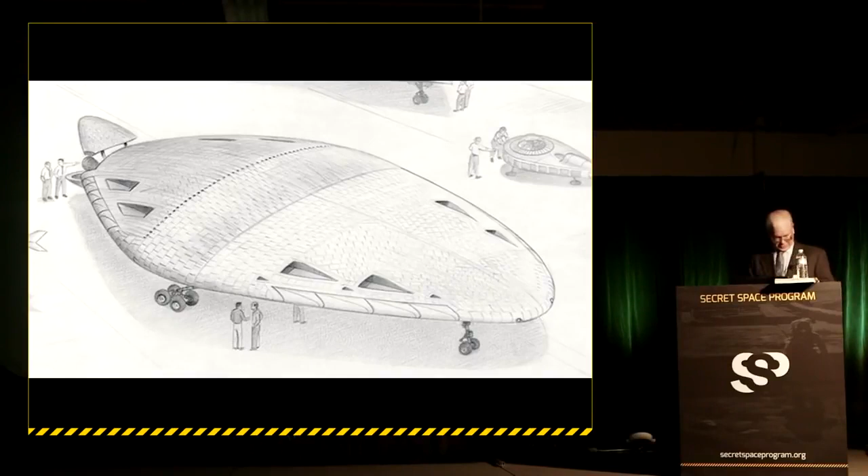Some of the vehicles include the so-called Flux Liner, or Alien Reproduction Vehicle. Okay, let's see here. Put this up a little bit. There we go, is that good? Okay, can you hear me now?

This is the first generation Aurora. It was a remotely piloted vehicle built by Lockheed Martin. This object you can see in the distance was actually taken from a Polaroid photograph that was taken in 1984 near Cedarville, California, up in the northeast corner of the state.

Now for me, this is one of the other vehicles here. This is a drawing put together by my friend Michael Schratt. This particular vehicle I'll go into a little bit as well. It was part of a crash recovery in East Germany.

Now, after I got out of high school, I realized that in order to go to the... okay, there we go, sorry about that... one of the things I was going to need to be able to do in order to go to the college I wanted to go to, which was a place called Art Center College of Design in Pasadena, I wanted to design cars for General Motors. And this was the premier college that all the designers would go to. And at $2 an hour minimum wage at the time, I knew that there was simply no way I could afford to save up the money to go there. So I decided to join the Air Force and get the GI Bill to help pay for my college education.

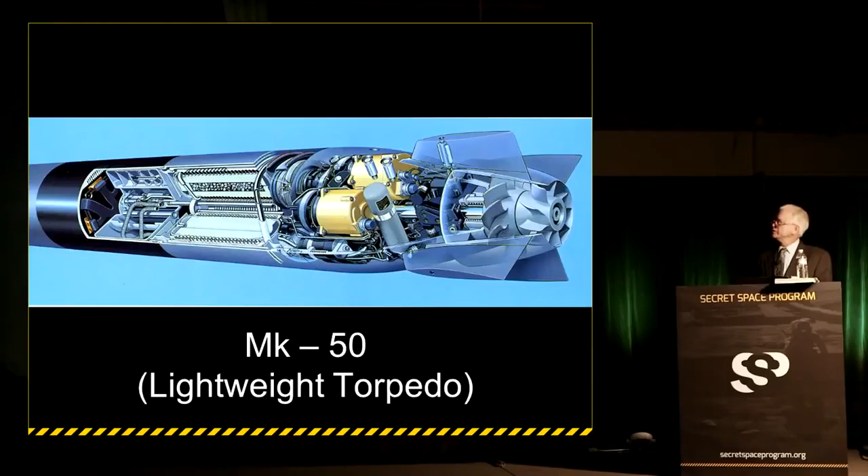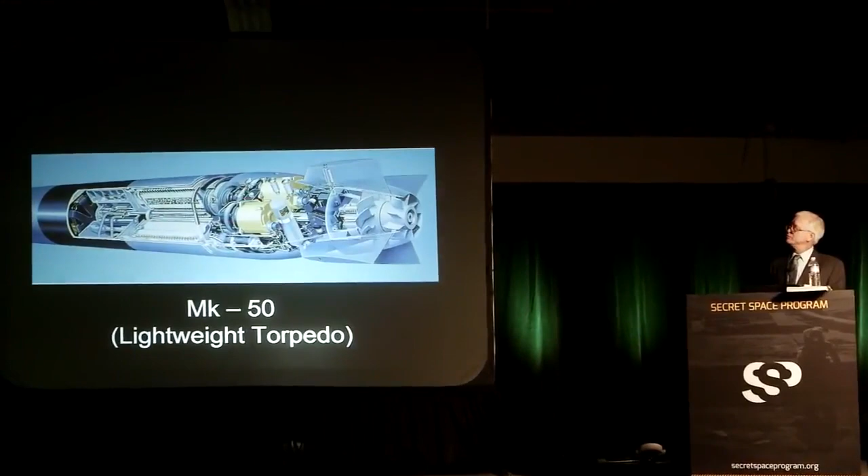This is a cutaway illustration of a propulsion system for a lightweight torpedo that basically involves a lithium core that is ignited once it drops into the water, and this heats up an oxidizer, flows through here, creates steam, high temperature steam through these heat exchanging tubes, goes through a transmission, drives a generator, and also a couple of counter-rotating props in the back.

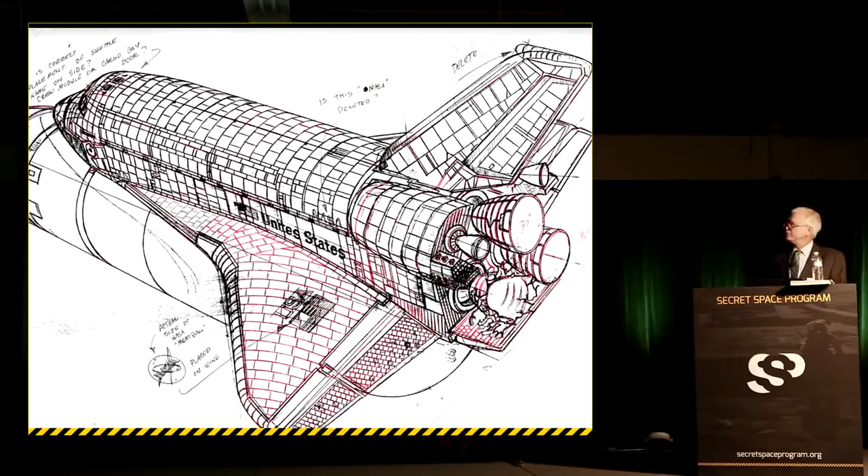But eventually, while I was working in the industry, I actually had the opportunity to make contact with a lot of people in the military, some of whom expressed an interest in having some of my artwork in their squadron ready rooms. So I was actually able to arrange to get what are called media orientation rides and go up in these planes and see how the pilots handle the stress of flying.

I asked myself years and years ago, if man had never taken the time to study flying insects or birds or bats or any kind of flying animal that we have on this planet, would they ever have had the inspiration to think of flying, to come up with the idea? I kind of wonder whether or not we ever would have been able to get off the ground if we hadn't had those other naturally occurring creatures to give us inspiration.

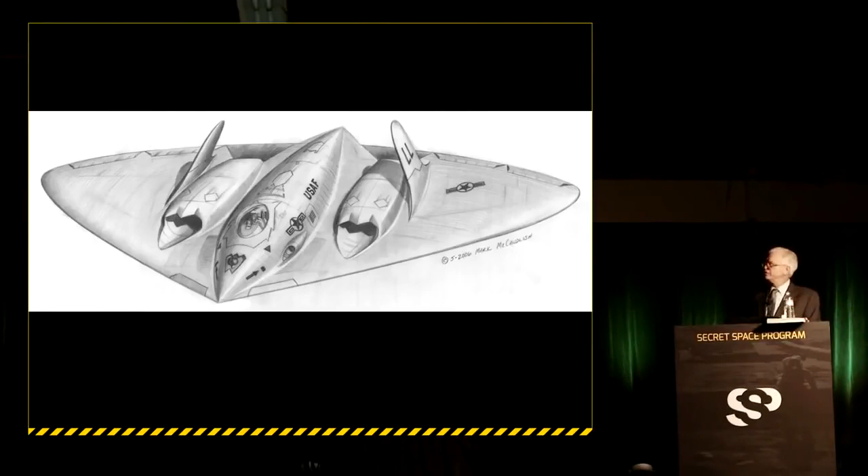There are ways you can modify the inlets for the engines so that when a radar beam from a distance is looking at the sky where the aircraft is, it's harder for that radar to get into the inlet where those metal turbine blades are turning and reflect a lot of the energy back, letting the people watching know that you're there. So applying these different techniques, looking for ways to make an aircraft perform better and do it very quietly, very stealthily, even in the materials that are used.

There have been a number of questions about what the name of this vehicle was, but for me, the discovery of its reality was kind of what led me down the road to being aware, or suspicious anyway, that there was a kind of secret space program. The way this happened, I was approached by Lockheed Martin—I think at the time they were still referred to as only Lockheed.

The particular division that approached me was working on behalf of the Skunk Works division. They said we have a new aircraft that we want to build, and we need to get the appropriate funds from the government.

So we need you to create an illustration for us that shows an aircraft that's really fast, something dynamic, very fast. At the time, I was reading trade journals like Aviation Week and Space Technology, and I knew one of the up-and-coming technologies they were talking about was called scramjet technology, shorthand for supersonic combustion ramjet.

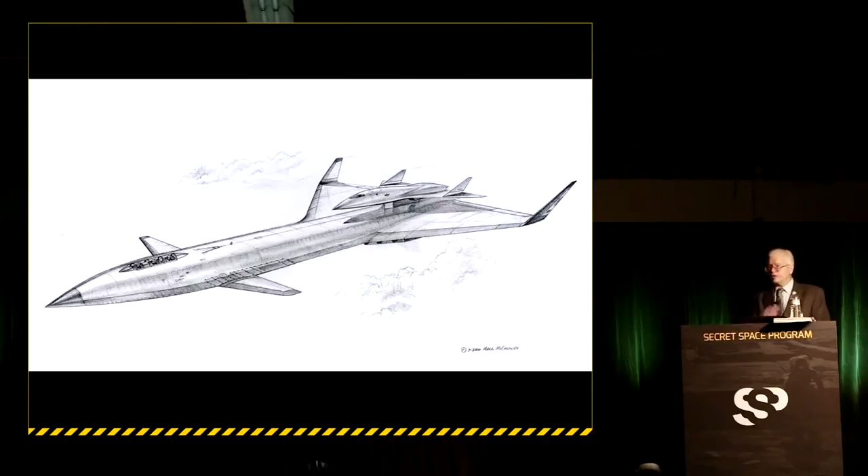Shortly after I submitted a sketch of this particular aircraft, they decided to completely scrap that. So I wound up doing an illustration of an aircraft something like this. There was one proposal where it might actually be possible to deploy this particular aircraft right out of the back end of a flying C-5A Galaxy.

And this is sort of my conceptualizing of how many you could actually fit into a C-5, knowing what the size of this aircraft was.

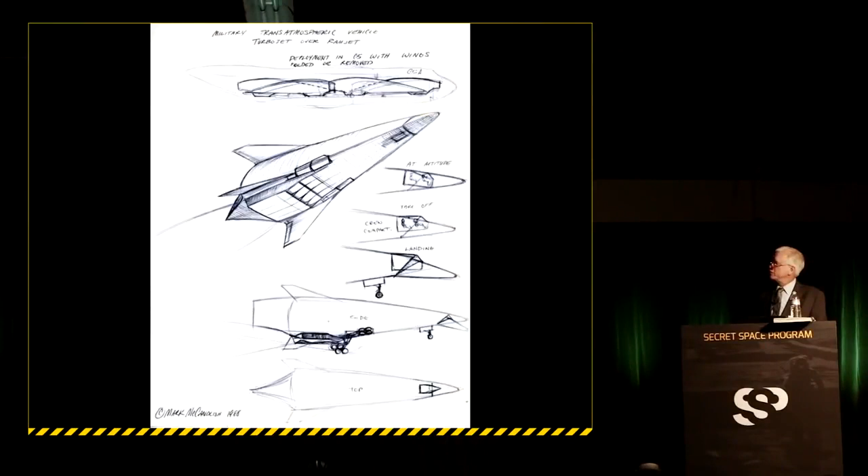It had a scramjet nacelle on the ventral surface, and it also had one on top. This particular version only had one underneath. And because of the shape of the aircraft, it made it very peculiar, or very awkward, where the landing gear would come out in order for this thing to work properly.

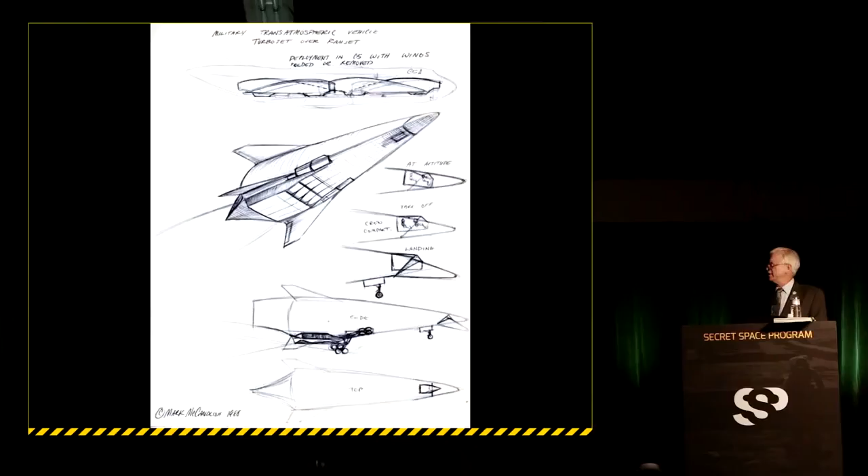Now, about the same time, there was a lot of talk about a crash, an aircraft vehicle crash that had occurred somewhere near Barstow, California. And there were some people describing different features of the aircraft. There was a fellow that I met and talked with who was friends with a number of the astronauts.

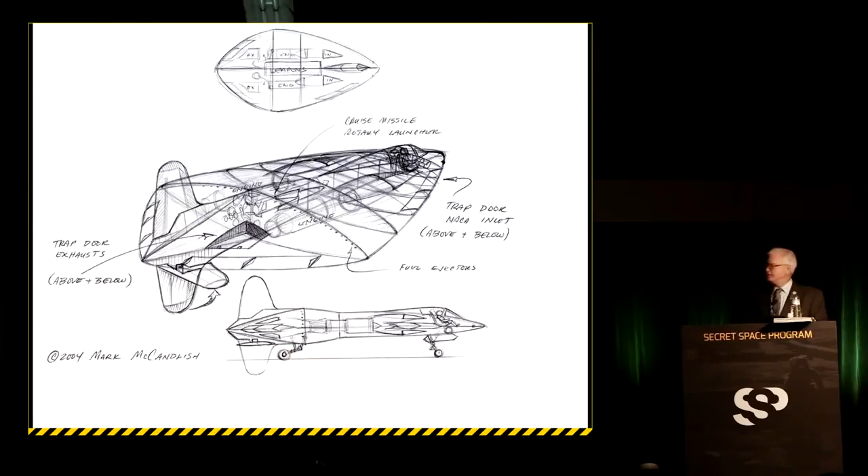They were describing how there was a particular astronaut flying a Learjet, ferrying it from one location to another through the state of Nevada. And he came out of the clouds and found himself sitting slightly above and behind an aircraft that looked just like this.

Now, the interesting thing about this aircraft is that it had some very strange features. It had engines that were buried inside the fuselage with sort of a NACA duct-shaped inlet. There was kind of a slot in the back. It looked like there was maybe a trap door, control surfaces along the bottom, exhaust diffusion. But it also had this very interesting feature, and most people don't know this.

The predecessor of the SR-71 Blackbird, the YF-12A, which was kind of a strategic aircraft used for missile delivery, it also had a folding ventral vertical stabilizer, or tail as you would call it. And so this aircraft obviously had that same particular feature.

The vehicle was all black, or sort of a deep gray. And as the pilot was flying along, looking at this thing flying through the clouds, he suddenly realized that if he had not seen this thing directly, he might have collided with it as they were flying through the clouds together. So he gets on the radio to his ground control people.

He says, I've got some traffic up here, why didn't you warn me? And they said, well, there isn't any traffic up there. And he says, well, of course there is, I'm looking right at it. It's black, shaped like a flattened out football, no wings to speak of, two tails, one above, one below.

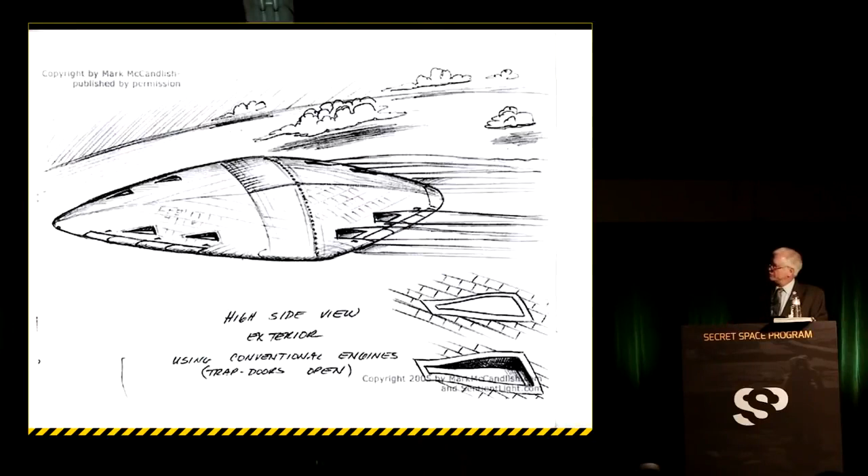And on that ridge were a number of what looked like fuel ejectors or fuel injectors pointing outward.

And this aircraft here was then being described within the industry as this vehicle that would produce an exhaust trail, the so-called donuts on a rope exhaust trail. That it seemed to imply that there was two different propulsion systems in use in the aircraft to get it up to speed. Nobody really understood what they were or what actually made the aircraft function in the way it did.

But as it happened, I was asked to do this painting for Popular Science on the so-called Mach 5 spy plane, and it went into details about all the seismic events in Southern California that sort of raised the curiosity of some of the people watching what was going on.

And I remember at the time, this is in the late 1980s, early 1990s, that you could go out into the high desert of Southern California at night and you could see these things flying overhead, flying back and forth. When the sun was just below the horizon, it was dark out, but there was something still up there. You could see it moving, and moving very quickly.

About the time I did that illustration for the magazine, I was contacted by a colleague, a friend I went to college with, and I invited him to go to an air show at Norton Air Force Base in San Bernardino, California, about 75 miles east of Los Angeles. The Thunderbirds were going to fly, and it was a bit of an overcast day, but in the end I wasn't able to attend, mostly because I had a job to complete another illustration for a client over the weekend.

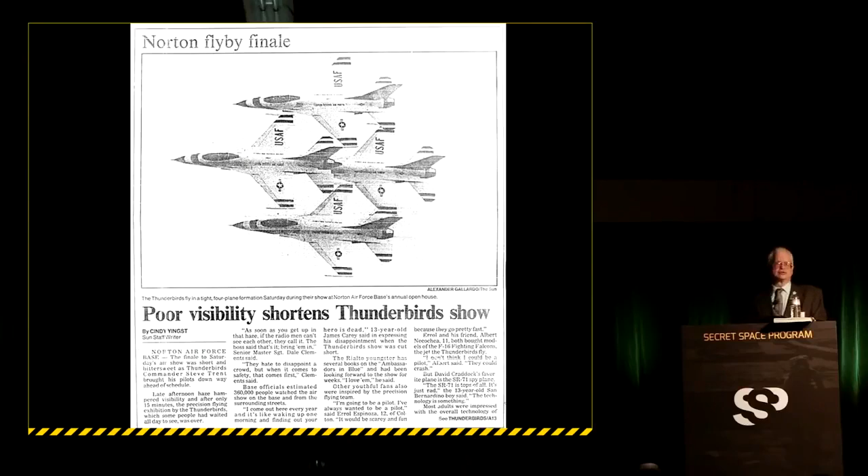As they were going into the hangar, the gentleman turns to my friend and says he just realized there are some aircraft on exhibit here that you're not cleared for, security-wise. You are not cleared to see these aircraft. So just enjoy the show, walk around, listen, take a look, but don't say anything to anybody.

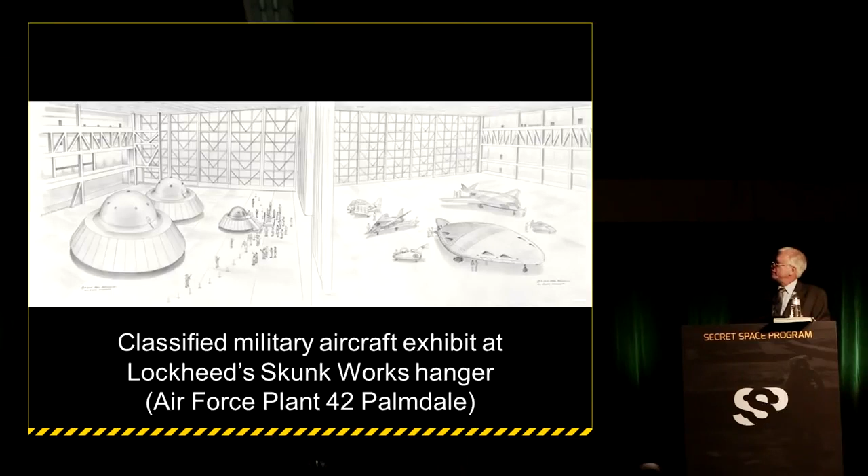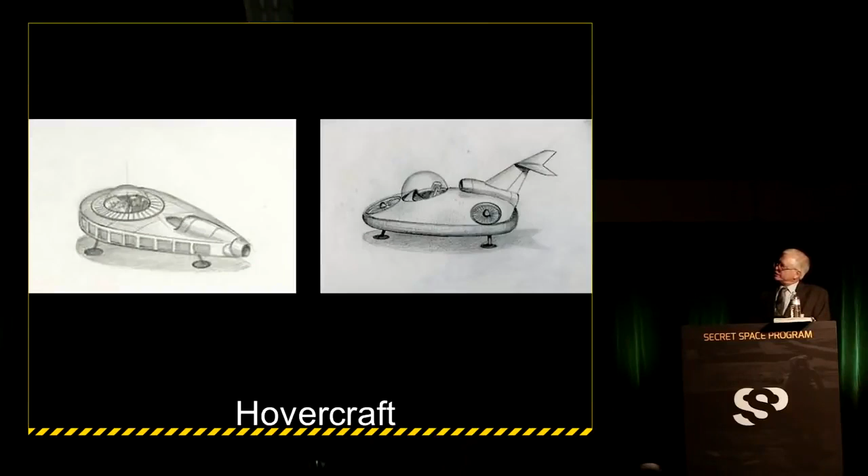The hovercraft were kind of unusual. There was one that had a jet engine in the tail, kind of a teardrop shape, and around the perimeter it had a series of little trapdoors that would open and close as the thing was flying along. This jet engine also had a transmission connected to a set of counter-rotating turbine blades that surrounded what amounted to a bubble-type cockpit, almost like something George Jetson would be flying in one of his cartoons.

This one over here, I've actually seen a version very similar to this in one of the popular science magazines, where it had a turbine in the front and two in the back, one on either side, driven by this particular engine through a transmission of kind. It had the same sort of sphere-shaped cockpit too.

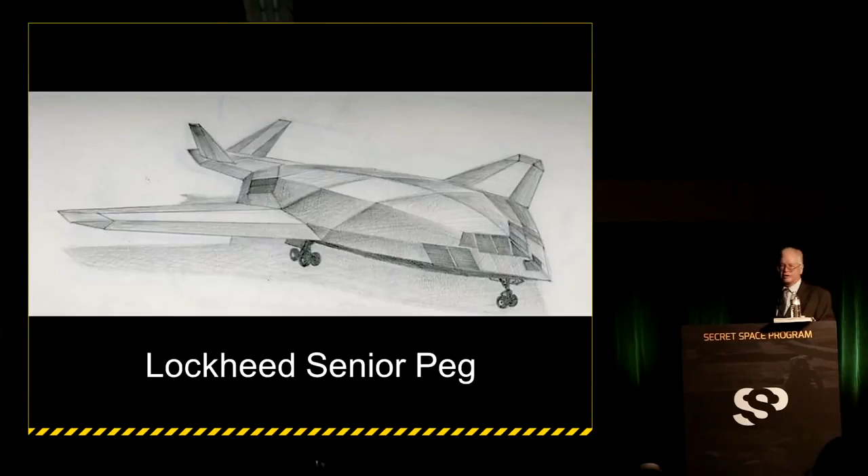Senior Peg was the code name given to the development of the Advanced Technology Bomber, and this was Lockheed's version. You can see it's kind of a derivation of the F-117A. It has the same kind of faceted surfaces, which help reduce the radar cross-section, or the amount of radar reflected back to an antenna from a source inside enemy territory. It had flush inlets on either side of the cockpit with a screen over them to prevent the turbine blades from reflecting a lot of energy back out to a signal source.

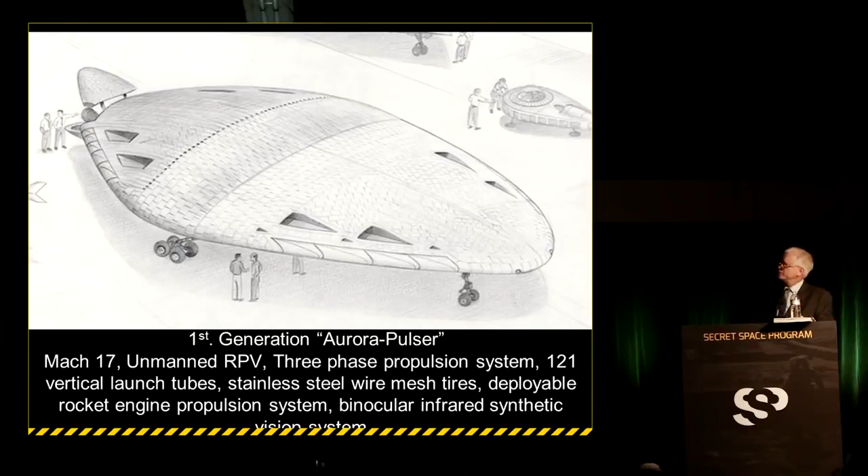From my different sources in the military, this aircraft, known as the first generation Aurora, nicknamed the Pulser, was entirely covered with space shuttle tiles. You can see evidence of the tiles all around the surface of the aircraft. And just like the aircraft I showed you earlier that had the tail above and below the fuselage, this aircraft had NACA duct-style inlets for 4 engines and 4 exhausts, both on the top and on the ventral surface, or the belly of the aircraft.

After I discussed this particular weapon system on Coast to Coast with one of the hosts working that program, I received email from a number of sources indicating there were inlets and exhaust ports both on the top surface and on the ventral surface. At the time of the exhibit, my friend said he could only see the underside of the aircraft. He couldn't see the top because it sat up kind of high off the ground. So he didn't know whether there were 8 exhaust ports or only 4.

It turned out one of the people I corresponded with after the radio program said they had been jogging late at night when an aircraft like this was leaving one of the United States Air Force bases in Great Britain. He said what was unusual is that when it went to take off and lit up the afterburners, which dumps extra fuel into the exhaust stream, you see this bluish glow coming out of the exhaust. He said there were 8 ports, which helps point out you have 4 above and 4 below. So we knew that was true.

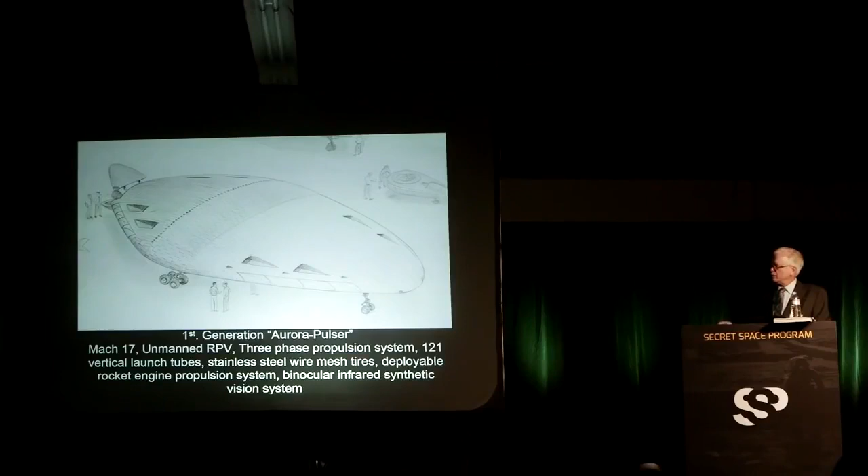Now, one of the things you don't see in this particular illustration, but is a little more evident in this illustration I did for Aviation Week—the perspective on the underside is a little off, these should be flattened out more—is that there are 121 vertical launch tubes in the belly of this vehicle. Each one is capable of carrying something like a cone-shaped reentry vehicle, like a MIRV, which also suggests deployment from outer space.

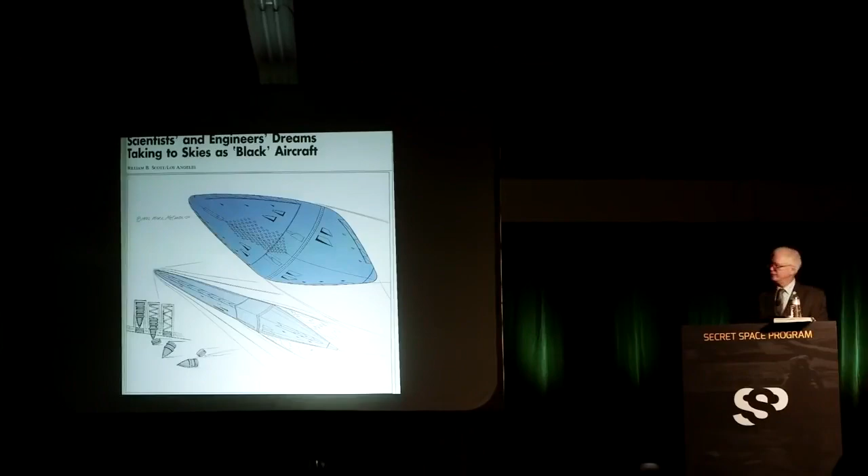The way the system would work was remarkably simple. It had a kind of tile with explosive bolts holding it in place on the outer skin, and sitting behind it the weapon would be held in place. It's not shown here, but I've subsequently learned there was a kind of three-piece fiberglass sabot which would hold the weapon straight in the bore, so it would always point a certain direction. The ingenious and simple aspect was that when the explosive bolts on the outside were ignited, the tile would disintegrate and blow away. A big coiled spring, about 12 inches in diameter, behind the vehicle would push it out of the hole. Right behind the reentry vehicle, another tile would slam down into place and cover up that hole again, almost in a tenth of a second.

The reentry vehicle would then stabilize, because of its center of gravity and shape, in the airstream, go into the atmosphere, and be able to acquire its target and do its job.

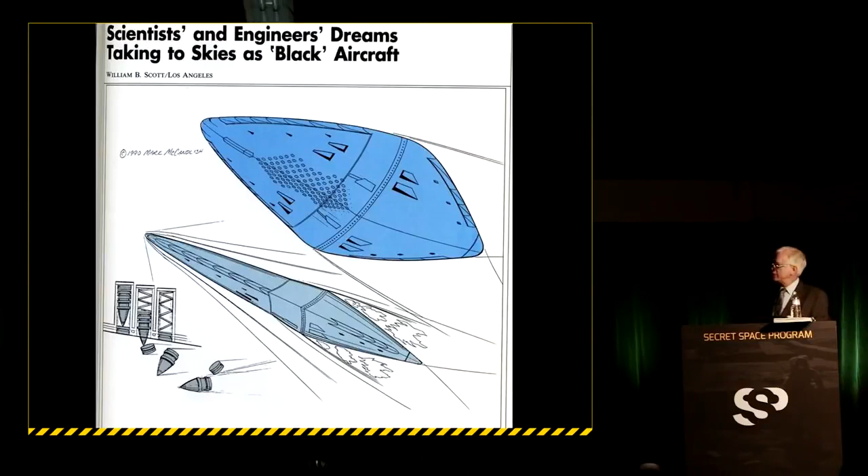One of the things this aircraft would do—if you look at the ridge where these fuel ejectors were located—is expel fuel that would be ignited by the intense pressure and heat of the air flowing across the front of the aircraft. One thing the artist didn't capture in this view is that the front end is going through the air so fast that it's glowing red hot, just from the velocity and friction at such high speed.

As that air is further compressed coming up on this ridge, it meets with the fuel. As the fuel is sprayed into the airstream, it spontaneously combusts. But by this time the aircraft is already going well above Mach 1, so a supersonic shock wave forms and basically separates—

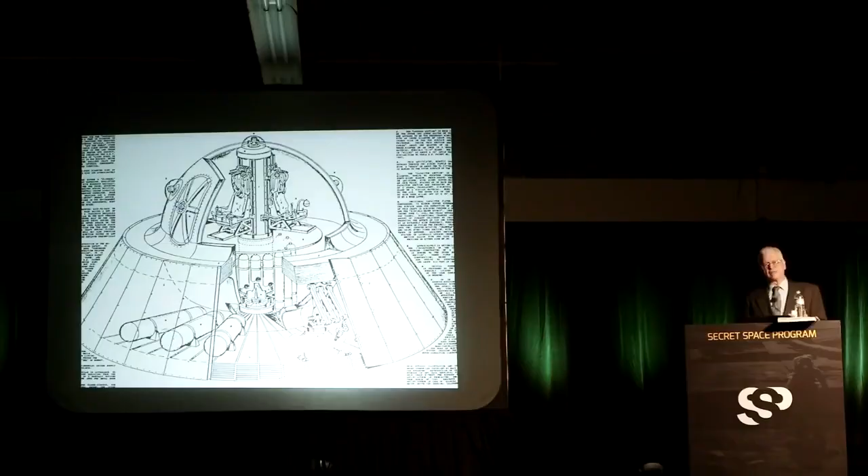So if you think about it, there's a process used throughout the industry, and even in the dental industry, called centrifugal casting. In centrifugal casting, you create the mold and whatever components you want to go in it. You have a kind of sprue in the middle, and then you take the molten component you want to go into the mold and pour it into the center through the sprue, kind of like a funnel-shaped opening.

And if the mold is spinning, the molten material flows out to the outer edges and pushes away all the little air bubbles that might get trapped, and they all migrate back to the center where they can be drawn out. So you wind up with a single casting, if you will, with all of these components in it that will not have any air bubbles, inclusions or impurities, anything that would cause the system to short out when you're using millions and millions of volts of electricity.

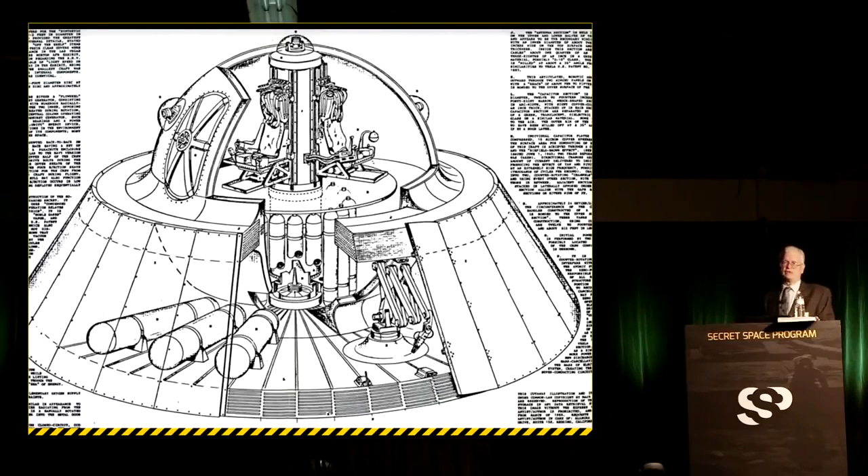But even so, when I sat down and computed what the total weight of all that metal and quartz would be, 24 feet in diameter and 12 to 14 inches thick, it worked out to something like 24,000 pounds. So you have to ask yourself, how can something that weighs 24,000 pounds get off the ground?

Especially since nobody believes that something using the Biefeld-Brown effect could actually levitate something that heavy. One of the things the witness said was that the greater the mass of the dielectric, if you dope it with other materials like uranium or something of that nature, you can actually enhance the effect. So here again, material science becomes very, very important in how things happen.

One thing often talked about is the universal speed limit, the speed of light, and how it's supposedly impossible to travel faster than it. Yet experiments have been done in recent times, a kind of anti-gravity experiment done by a Russian fellow, Yevgeny Podkletnov, where they had a spinning disk made of superconducting material with coils around it, very similar to what you see here. They found that when this superconducting disk was chilled to its operational temperature, there was a kind of beam of an environment above the disk where objects sitting in that environment had approximately 3% less mass than under normal circumstances. So you could actually reduce the mass of a vehicle using this kind of technology.

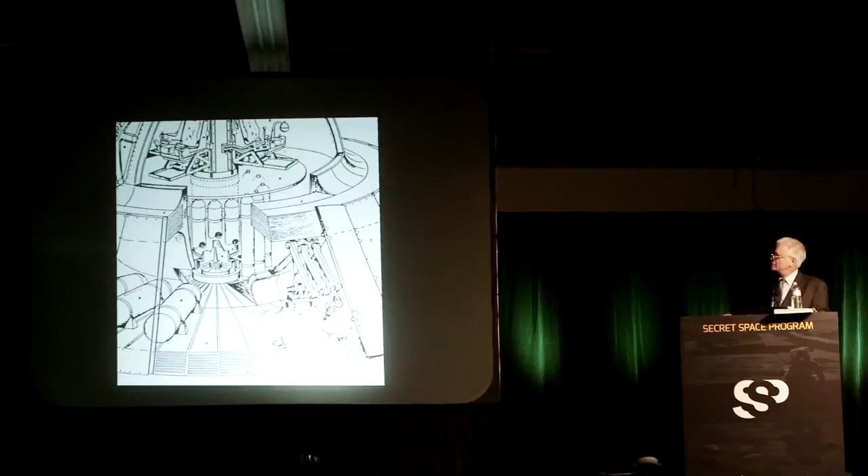So I began wondering if this wasn't just copper wire, but copper tubing, with something else on the inside. I looked at notes from the eyewitness, who described wrapping around the inside of that central column tube, and I thought of this like a high voltage device, sort of like a cyclotron. I think what was really happening was that electricity would jump between these two points, creating a high voltage event.

This device that my friend saw was supposedly putting out 125% more power than you would actually put into it. That's what you call an over-unity device.

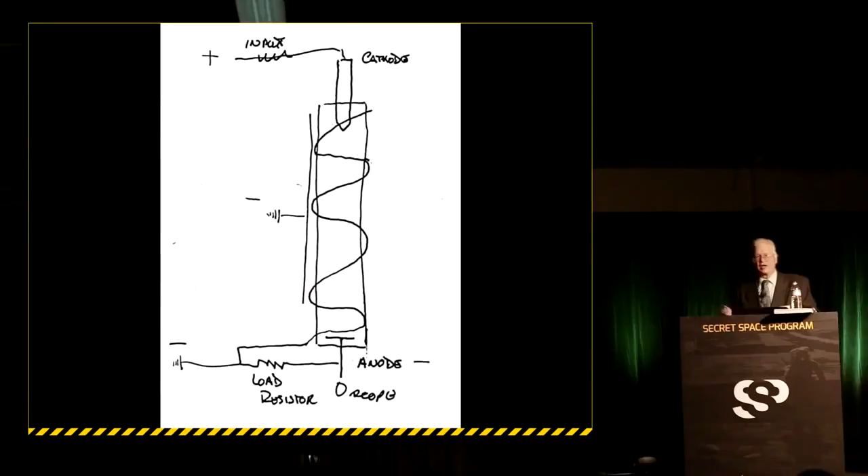Or that you will have a runaway condition where it creates something like a nuclear explosion. And so I began looking around for some evidence that this device that was described actually exists. And it turns out, if you look down the bottom of that page, you'll see pretty much exactly what he described. This is a patent.

This was patented by a gentleman named Kenneth Shoulders. He was a fellow who worked with another friend of mine, Hal Puthoff, for a number of years. And he had done a lot of research into something called zero-point energy.

Zero-point energy is a technical term in the physics literature, referring to quantum zero-point fluctuations of the vacuum. Now, the discovery of zero-point energy was made probably back around the end of the 1800s, early 1900s. They were beginning to experiment with cryogenic fluids, taking a gas like nitrogen or oxygen and compressing it down to the point where it actually became a liquid, became super cold, hundreds of degrees below zero.

And the research they were doing was trying to find out what the actual temperature was of absolute zero. By absolute zero, I mean that there's no warmth left in the material, no Brownian motion, no movement where the individual atoms or molecules are vibrating, bouncing around. And they found that even when they got down to the point of almost absolute zero, there was still this kind of vibration in the material.

The German physicist Max Planck called it Zitterbewegung, which means jiggle. And so they determined that this jiggle was a kind of electrical charge that was embedded in the fabric of space-time, and that's where the name comes from, zero-point energy, looking for zero energy.

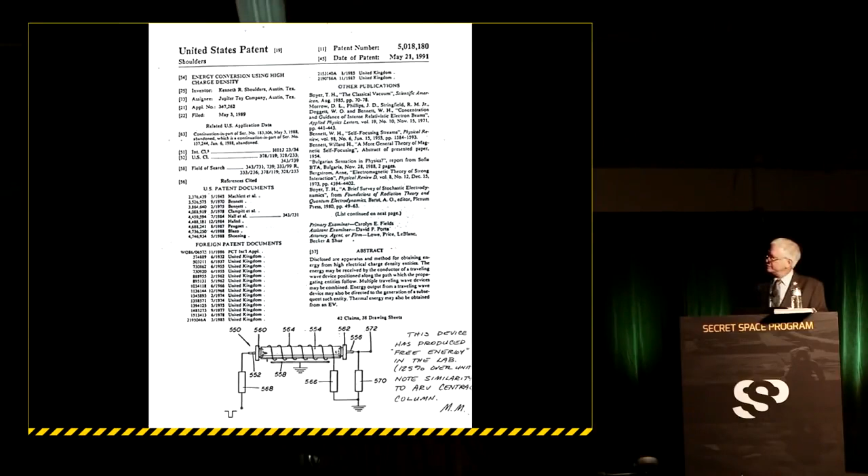So I started looking at what zero-point energy is, where it comes from, how it can be manipulated. And I looked at some of the papers that were written by scientists like Bernard Haisch, Alfonso Rueda, Hal Puthoff, Daniel Cole. In the early 1990s, they wrote a number of papers that actually described this, and you can see the similarity between the two things. You can see that there's clearly a design similarity.

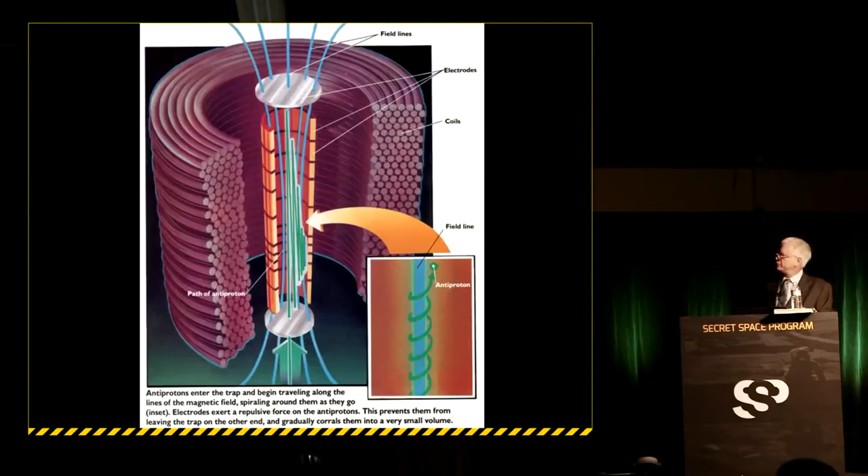And yet, I looked for other possibilities as well. The possibility that we had something like an anti-proton trap going on here, where there might be some aspect - you have the same kind of coils going around the outside, a central column, a way of trapping antimatter. I thought that this might be something like the so-called antimatter drive that was used in some of the Star Trek vehicles. So I began conceptualizing, began looking at different ways that you could actually make this system work.

Now, somewhere along, I think it was somewhere in the late 1990s, early 2000s, I came across a number of books that described - Joseph P. Farrell, who's another one of the speakers here, had found some historical records after the Second World War that described a device that was being worked on by the Nazis in the Wenceslas mine up in southern Poland, called the Nazi Bell Project, or Die Glocke.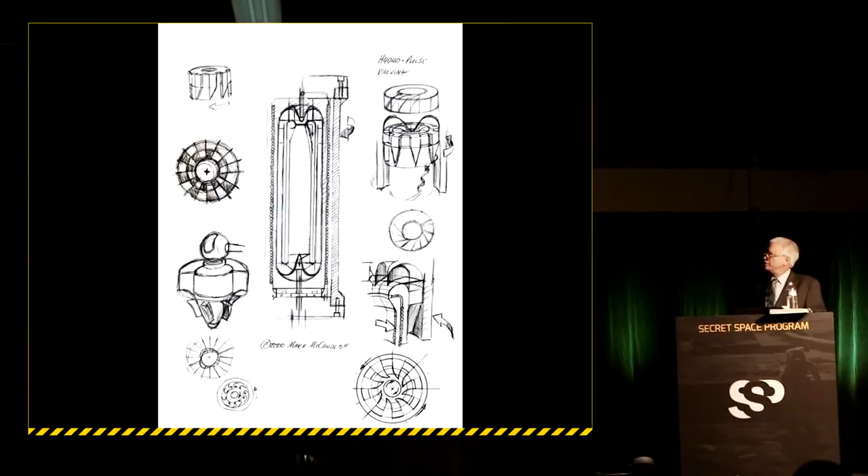Now, that particular system, based on the documents that were found, was made up of a pair of counter-rotating cylinders, one inside the other, with a coil that went around the outside. And electricity was being fired through the system. So I started looking at ways that you could make that work.

Now, the first thing I thought of was that if you put a lot of electricity in this thing and you have big coils around it, you may wind up in a situation where you can't get an electrical motor to actually drive the system, unless you had a pulley system sitting way off to the side, away from the electromagnetic fields that would interfere with its operation. But I found out that, of course, mercury has some interesting characteristics.

I think there's something referred to as the nuclear spin ratio. The particles in the nucleus of the atom of mercury and the electron shells have a spin ratio of something like 60 to 2. And bismuth, by the way, also has the same kind of property. I thought it was interesting that these two materials had these unusual characteristics that might be very important in the operations of this kind of thing.

So what I found was that it goes all the way back to Michael Faraday, and the first electrical motor was really just a puddle of mercury with a magnet - a permanent magnet sitting in the middle of it in a petri dish.

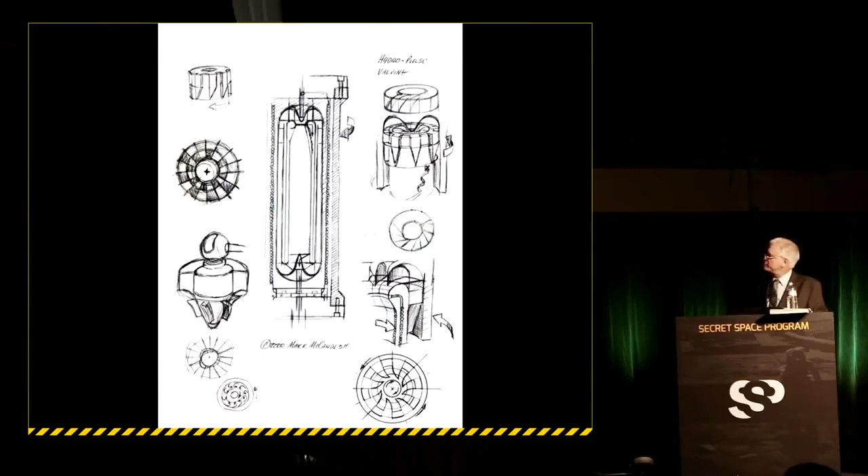He had a little scaffold off to one side with a copper conductor, and he put one wire into the mercury, sent it over to the battery. Another wire would hang down from the top of this little scaffold. The minute you connected the circuit, the mercury would begin circulating around inside the petri dish, around this magnetic field.

If you look at the way the field lines are set up in this particular vehicle, you can see that the field lines basically go out around the outside and stroke down through the middle. That's what they do. By setting the system up this way, you already have the built-in mechanism to make this thing rotate on the inside, just like Michael Faraday's little motor from back in the 1820s, I think it was.

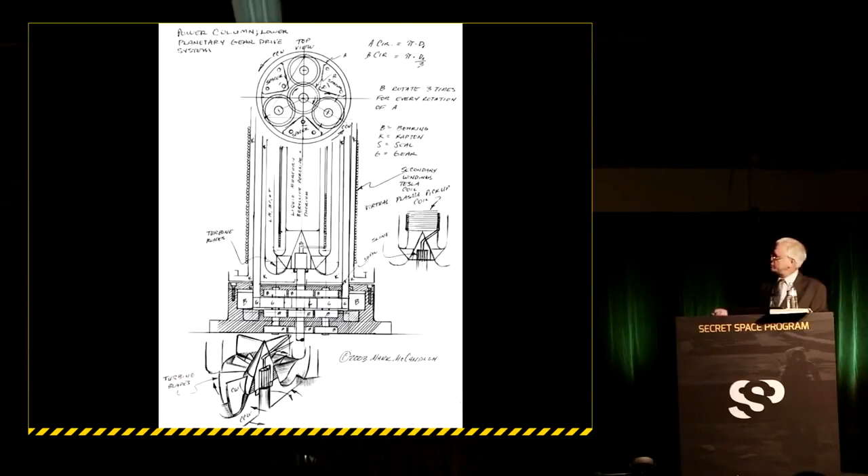The other thing I realized was that you're going to have some way of circulating the mercury. So in one of the instances I was looking at ways to mechanically do this and get this counter-rotation thing going on, described in some of the papers from the Nazis' experiment, was creating a kind of planetary gear drive system that would sit either at the top or the bottom, so that as one of the cylinders is turning one way, the gears would force the other cylinder to turn in the opposite direction.

The benefit of doing something like this is that when you have things turning in opposite directions or sliding across one another, you get this vorticular motion in the mercury. It seemed to me that that particular vorticular motion was something very significant, very important to the operation of the system. And it's all leading up to the tapping of zero-point energy, which I'm going to get into shortly.

The idea was that the mercury would come up in the gap between the two cylinders, reach the top, and be forced down through this venturi, this little funnel-shaped opening at the bottom. You'd have your cathode up here at the top, and you'd have a ring embedded in the quartz of the interior cylinder. This is the other cylinder on the inside here.

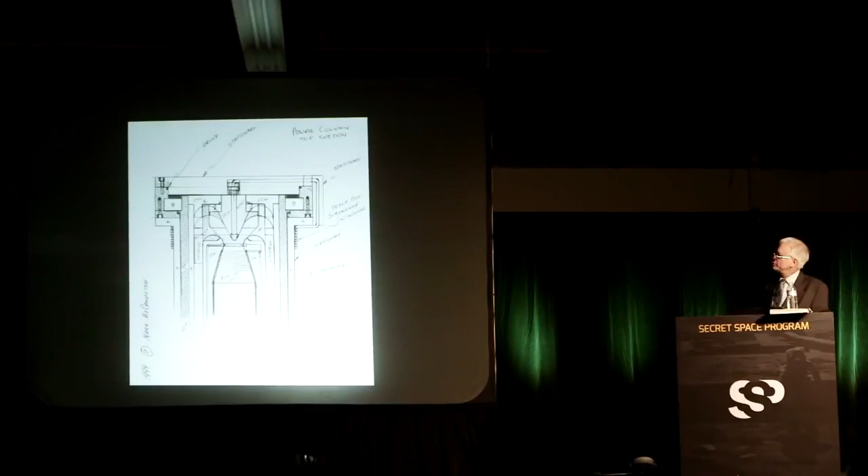You'd have coils inside, so that as the mercury was being charged with electricity, it would cause the mercury to circulate. But because the cylinders are turning in opposite directions, you get this natural tornado-like vortex formation in the movement of the mercury through the system.

Now the next thing I did isn't as easy to see in this particular diagram. I wonder if the next diagram has a better way to see it, right here down in the corner. You see the mercury comes up here and goes down through this opening, and then right below that second electrode shaped like a ring, you get the electricity jumping from there to there as the mercury is being pumped through by the natural flow caused by the electricity going through it.

As a sudden discharge of electricity goes through the mercury, and the mercury is spinning the whole time - it's spinning like a tornado - you send the electricity through it, and when you do, it creates a phenomenon very similar to when a smoker blows a smoke ring.

If you've ever studied a smoke ring, you can see it's caused by a sudden discharge of smoke from the lips of the smoker, and the surrounding still air slows down the outer edge of the smoke as it's being expelled. So it creates a self-stabilizing event where the smoke forms a perfect ring. Even dolphins can do this with the air blown out of their blowhole.

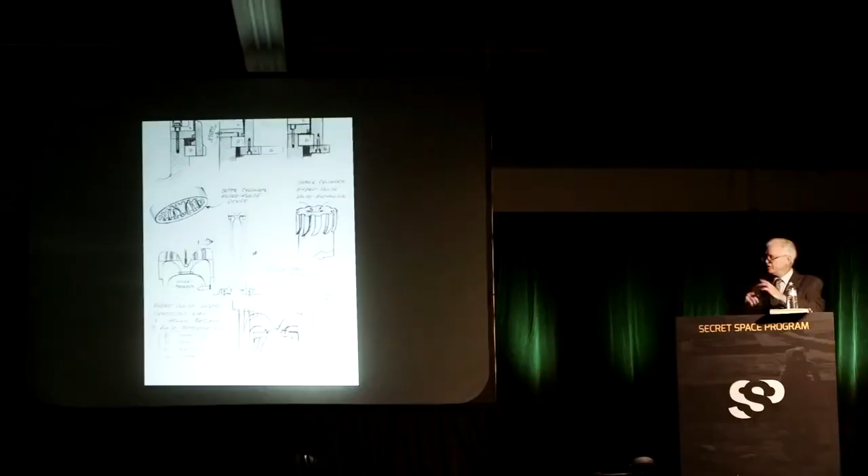The other thing about that is you find that as this phenomenon is moving downward, probably approaching supersonic speeds, down through this central column here - there we go, down through the center, right there.

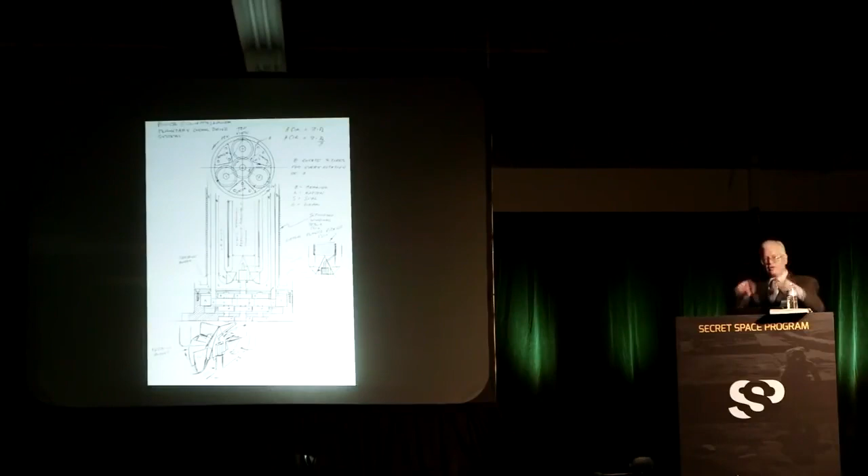Because of the rotation of the device, not only is it creating a kind of smoke ring of ions, highly charged ions blowing down through the center of this device, but you also have a precessing, rotating around a horizontal axis and a vertical axis, so that you have this twisting motion that goes on. What that actually winds up simulating is ball lightning, which is a naturally occurring phenomenon. It's noted for its ability to be self-sustaining. It creates its own electromagnetic field.

So in the process, what I really think I've stumbled across is a way in which this system has 3 different electromagnetic fields. It has the one created by the secondary windings of the Tesla coil, it has the windings in the center that also create their electromagnetic field, and then when that plasma ring, or low temperature plasma-like phenomenon, or virtual plasma, fires down through the center, it also creates its own set of electromagnetic field lines. So what happens is you have an effect very similar to the electromagnetic pulse that occurs when a nuclear bomb goes off.

They actually have a weapon called the explosively pumped electromagnetic pulse weapon, and it does the same thing. It combines overlapping electromagnetic field lines, and then using explosives, it pinches all those magnetic field lines and creates a powerful pulse.

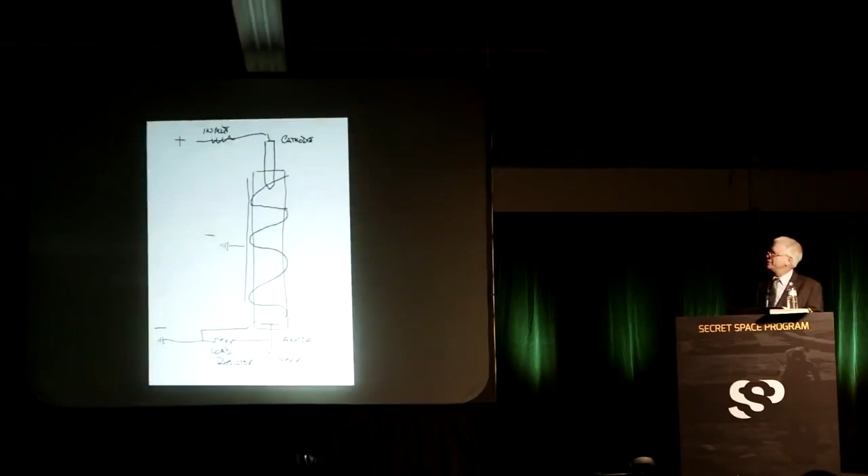So what I'm suggesting is that process forms a kind of a doorway for tapping into zero-point energy. Now why is that significant? Why does that mean anything? Well, part of the reason is that this device, when it taps into zero-point energy, they've shown that zero-point energy is actually responsible for the effect of gravity, for inertia, and for mass.

So if you're pulling some of that energy out of the environment, it may be, even though there's an infinite amount — some of the latest figures are 10 to the 109th power joules per cubic centimeter, that's one of the latest figures I've seen — that's a monstrous amount of energy. That's enough energy that if you took all of the energy in this amount of space-time and were able to tap it, it would be able to boil off the oceans of the entire planet.

So you can see how this technology makes a hydrogen bomb look like a firecracker. That's probably one of the reasons why there's such a tremendous effort to suppress it, because in the wrong hands it could be weaponized and be very dangerous. But if used in peaceful ways, it provides you a tremendous amount of power.

And that power, when pulling this energy out of the environment, it's my belief that there is a moment in time where it doesn't allow that zero-point energy to interact with the atomic structure of the vehicle. Now this interaction is what is referred to as the creation of mass.

For example, Einstein said you can never travel faster than the speed of light, because as you accelerate through space-time, your interaction with the zero-point energy embedded in space-time raises your mass. So it makes it harder and harder for you to go faster and faster, so you can never really reach the speed of light. In fact, he said that as you approach the speed of light, your mass would become near infinite. So imagine then that you're actually using the free energy of zero-point energy.

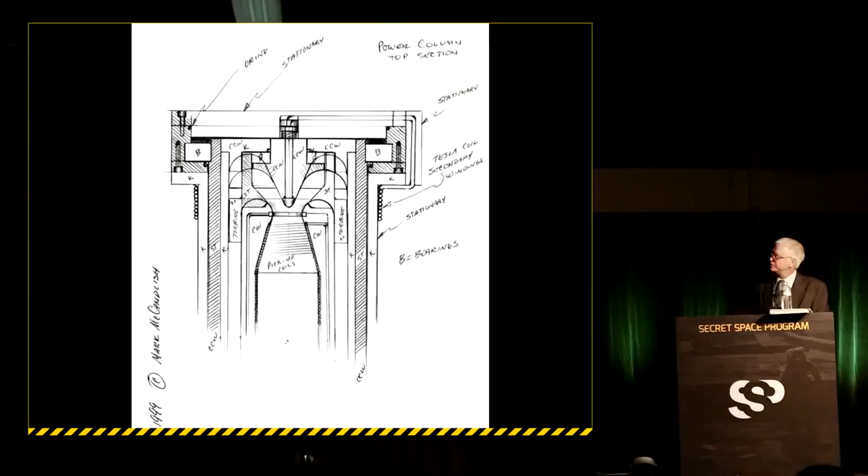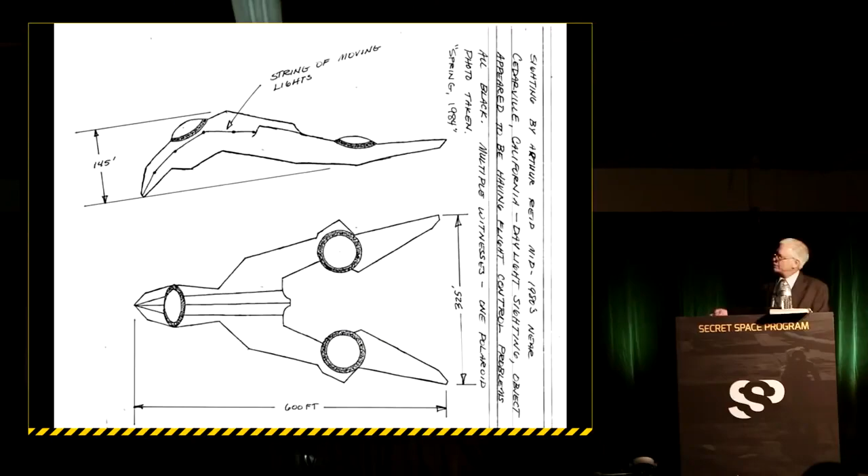Under a loupe, looking at the original Polaroid, you can actually see a little bit more detail. This was a drawing done by the eyewitness, the fellow who took the photograph. There were some things about it I could go into, but the important thing to remember is that some of the features look remarkably like some of the structure on the so-called alien reproduction vehicle.

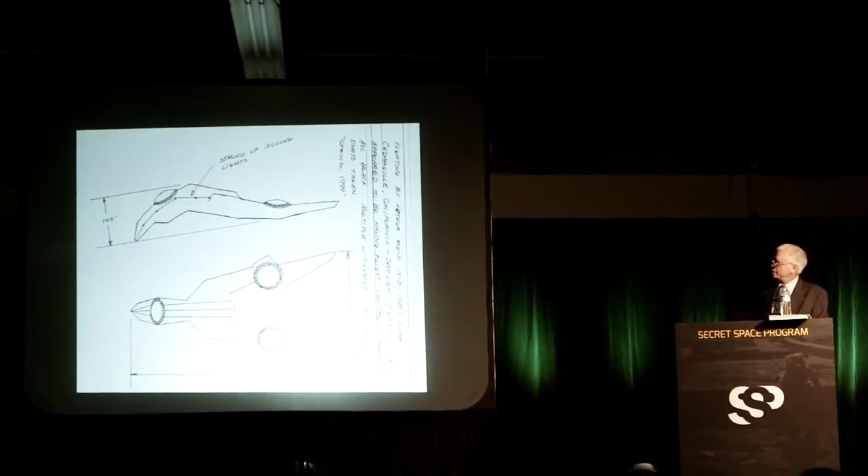It did seem apparent to him that these wingtips, if you want to call them that, could actually rotate inward so that this thing would become more of a triangular shape, which would also help with issues like storage.

Now, this is a more detailed drawing I did based on what I could see through the loupe. It actually looks like there may be some ways in which this area and this area can be articulated, so the thing can fold itself up for storage or for putting it into a hangar.

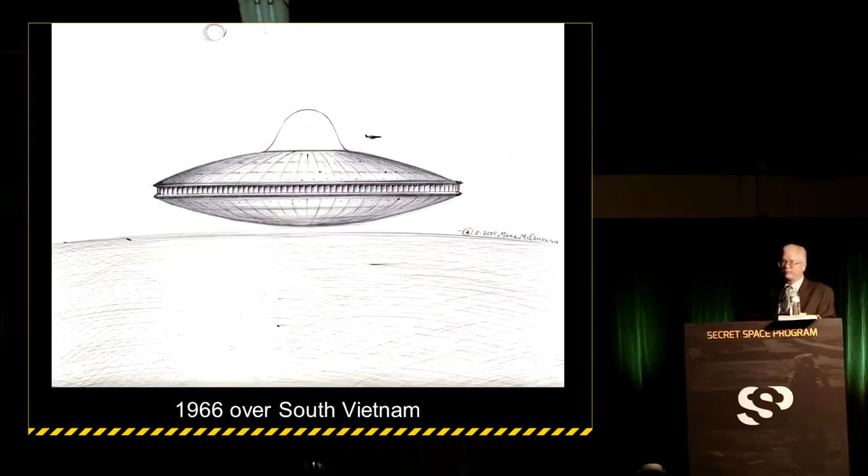There's a lot of other incidents, eyewitness testimony, pilots that I've spoken to. This particular image refers to a sighting that occurred back in the mid-60s on the way back to Vietnam. That aircraft right there is a B-52, a huge aircraft. They said this vehicle had a translucent illuminated dome in which they counted 27 stories, and that was kind of how they helped gauge the size of the thing.

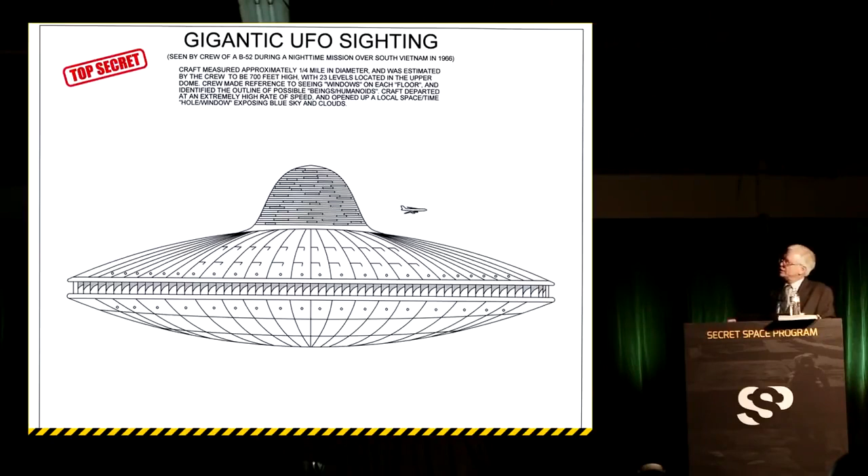He said each one of the turbine blades, these rotating turbine blades around the perimeter, was the size of a bi-fold door on a huge hangar. So one of the things significant about this encounter—this is based on an eyewitness, just a rough sketch here—

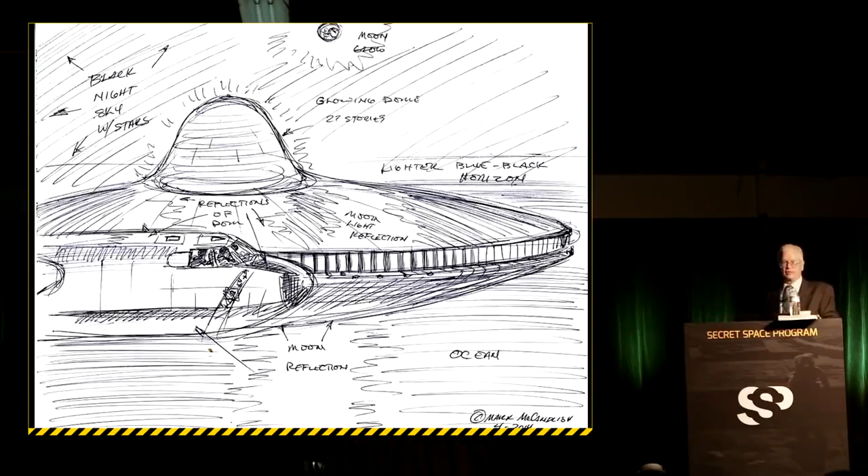this was taking place at night over the ocean at 1 o'clock in the morning, no clouds, just the moon. This large disk, which they estimated to be a minimum of a quarter mile in diameter, when it departed, as it went out through the blackness of the sky...

in its wake was this turbulent, shimmering image of what looked like a blue, daylit sky with clouds. So what seemed apparent to the crew of this B-52 was that when this thing created a wormhole, there was actually kind of an image dragging that would go along with it, that it would either show you where it was going to or where it had come from.

I've personally witnessed that on at least two occasions. Very often you find that these types of events are very mystifying and hard to understand because you don't readily understand what it is you're looking at.

Now, like I said, I'm running out of time here. This is a crash recovery that occurred in May 1989 in East Germany by some of our special forces. It was a vehicle utilizing what appeared to be a lot of stealth technology.

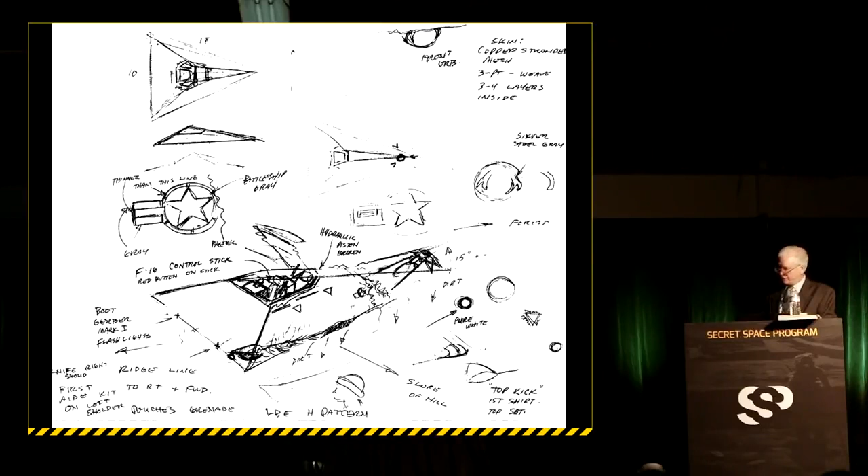The canopy on this thing had a lot of the same kind of details you'd see on the stealth fighter. You had the same sort of jagged edges, same sort of features that would help defeat radar reflection, things of that nature.

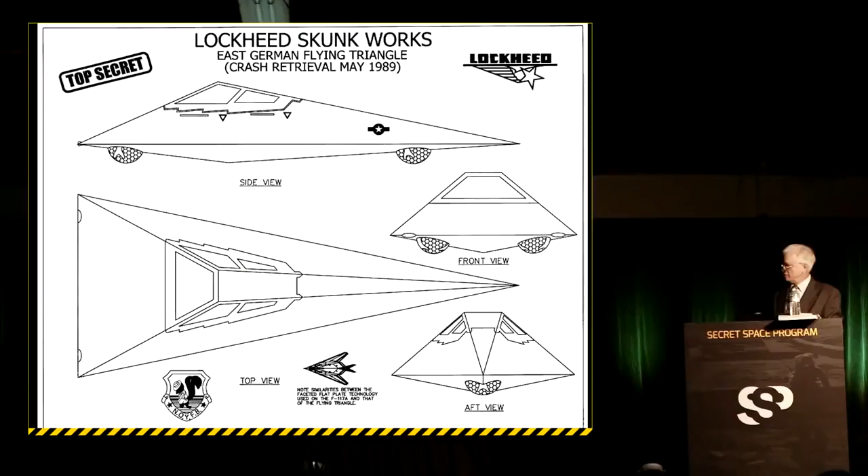When the vehicle crashed, the pilot hit a tree coming over a ridge line and then tried to pull the nose up. He hit tail first, and when he hit tail first, it broke the tail in half and released one of these spheres. That sphere looked pretty much like this—it had a couple of wires coming out of the top.

There was a little circular opening there with a metallic thing in the middle. But it had this beautiful pumpkin shape with a scalloped appearance.

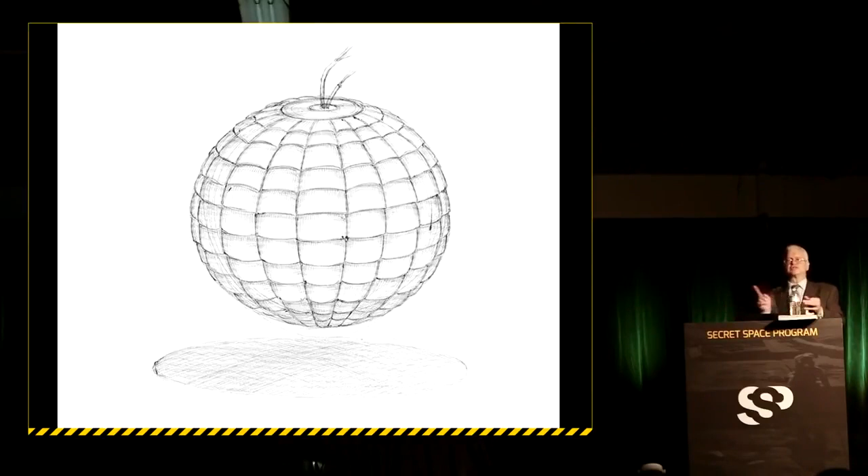He said that when the thing was bobbing around the field and they were trying to recover it, every once in a while it began to spin and wobble and get a little faster, and then sparks would jump across the two exposed wires, and it would slow down and start to calm down again.

They were given an aluminum utility case to try and capture this thing. They were told not to touch it with their bare hands.

So there's two reasons I can think of: one, either they're using cryogenic fluids and it's really cold and they might get a burn, or they might get electrical shock, which seemed pretty apparent. But the thing was floating above the ground.

One of the things we know about superconducting materials, in the context of a propulsive system - if you've seen films on YouTube of superconducting wafers floating above magnets - they have to be set, as it's referred to, in situ, in order to create that levitating effect. You have to chill that ceramic material down right at the spacing you want to establish between the magnets and the object itself, so it'll maintain that attitude.

And you can crank it to a certain attitude and it'll maintain that attitude, and you can move it around, but it'll always stay in that one reference angle.

So I started thinking that if this thing is filled with some kind of cryogenic fluid, and this is some kind of high-temperature superconducting material or ceramic material on the outside, you can see that the scalloping may actually create a kind of turbulence pattern on the inside that helps to stir it up.

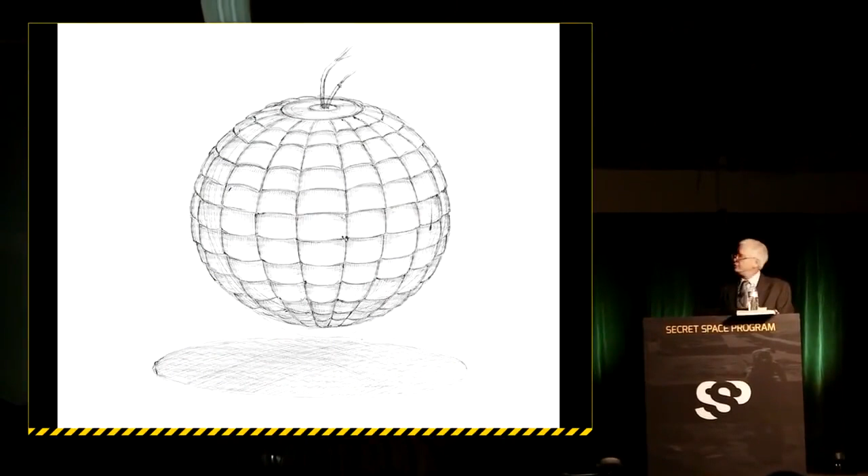So, one of the things I like to do in closing is this - this is the young man who produced the film you'll probably have a chance to see later on, James Allen. He's passed away now.

This was literally just a month before the film was being released. He suddenly became very sick, was in the hospital, and died within 2.5 months. The manner of his illness was so peculiar and strange, we decided to go have some pathology done. And what we found - it's really hard to see on this chart because it's so small.

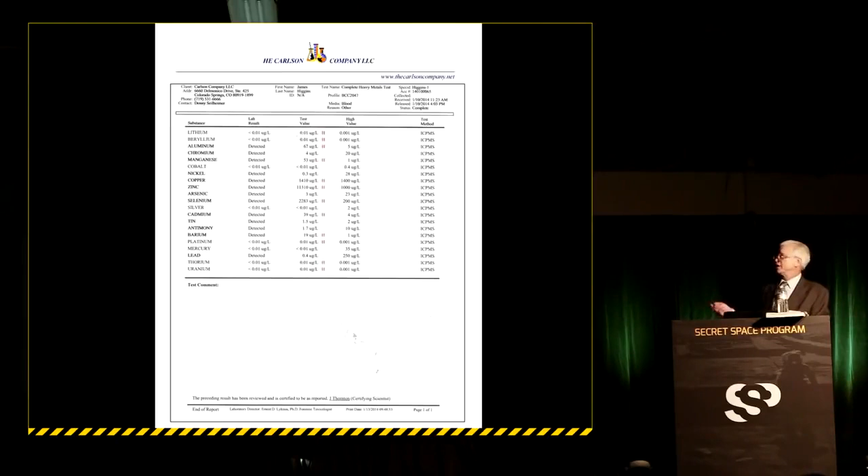I wish I could blow it up somehow, but basically all of these little things here, we see an H next to those levels. Those are all radioisotopes like uranium, thorium, beryllium, cadmium - things you would not find naturally occurring. So it seems apparent to us that he was poisoned using radioisotopes.

So I would like to dedicate this presentation to the memory of my friend James Allen. He's a brilliant young man who had great potential as a filmmaker ahead of him, and I thank him for the time he dedicated to documenting what I did. And I'd like to thank you for your time and attention. Thanks very much.